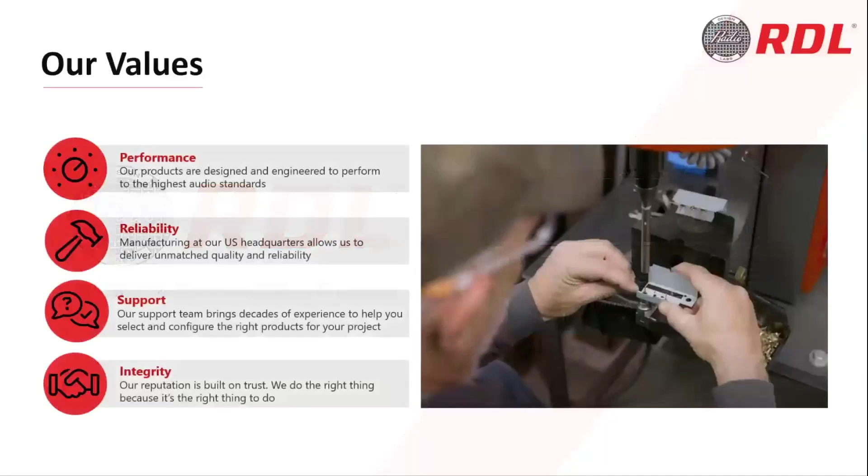Wonderful. Good morning, everybody. I also want to thank everyone for coming to learn a little bit more about our new RU-NMP44 network mixing processor. This is a great product. Before we start, I want to give you a quick background of who RDL is and our values.

If you're not aware, RDL initially started making audio solution products for the radio broadcast industry nearly 4 decades ago. The broadcast industry demands that their audio products produce studio quality audio signals, they have precise adjustments, and they are extremely reliable. RDL designed and engineered our initial products to meet those demands, and we've maintained the same production quality and high standards through today.

We build all of our products in-house at our factory here in Arizona. And this hands-on approach allows us to oversee every step of the production process and know that we're delivering products with unmatched quality and reliability. We also have a very experienced technical support team who's ready to assist you with your projects and product needs.

Since the beginning, our customers have relied on RDL to support everything from standard commercial projects to mission-critical installations around the world. RDL's reputation is built on trust. We will always do the right thing because it's the right thing to do. That is our company culture.

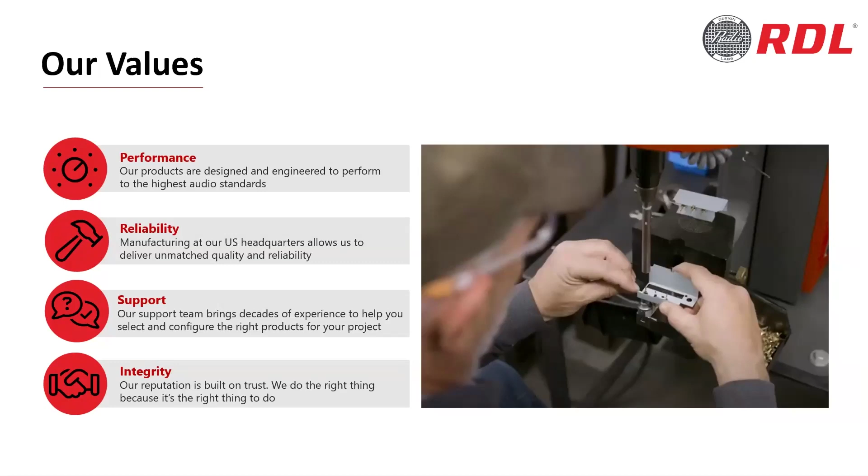This presentation will be divided into 5 parts. First, I'll play the short introductory video in case some of you haven't seen it. Second, I'll review our software configurable interfaces and our compatible remote controls. Third, I'll review several system application drawings to show you the flexibility and the versatility of the RU-NMP44 and to help you better understand how to use it.

Fourth, I'll give you a brief overview of our Console 2.0 software. And then last, I'll show you the basic programming features for the RU-NMP44. I hope by the end of this presentation, you'll have a strong grasp of where and how to use this processor and feel that it's very easy to program and configure. So with that.

Every day, there's a venue in your region looking to add multi-zone audio. It could be a brewery with different areas, a fitness center, a hotel, or so many more unique applications. What if this venue needs to route different audio signals to different zones, especially in real time? What solution should they apply? Analog? The control would be complex, it would be hard to install, and the labor costs would be high. Network digital? Better, but how can smaller venues afford a complex, expensive DSP system? Introducing the RU-NMP44 network mixing processor from RDL.

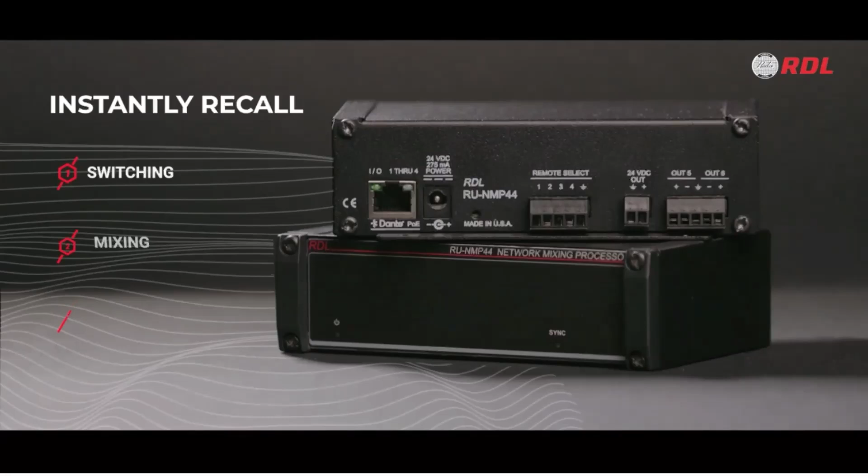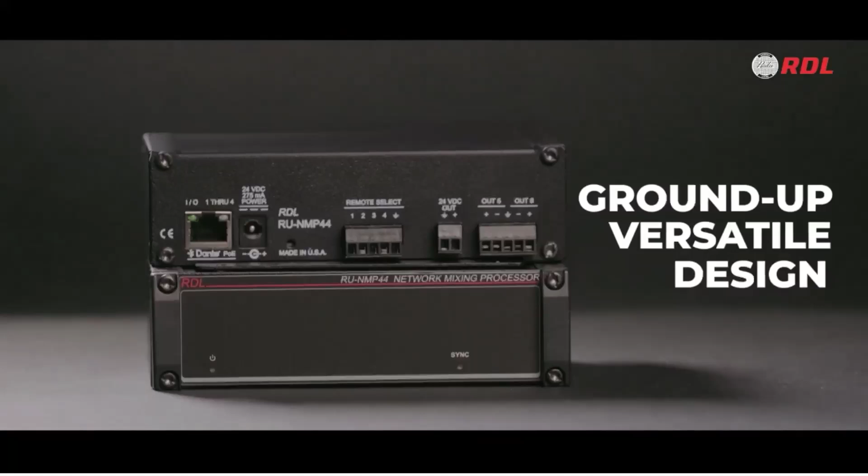The RU-NMP44 is a cost-effective network audio solution that offers network audio distribution, multiple mixers, priority ducking, multi-channel level control, and has both network and analog outputs. Custom configurations can be stored as presets for instantly recalling switching, mixing, and level changes. And with a variety of remote control options, the RU-NMP44 is the perfect mixing processor for any audio system, any size, any budget. With nearly 4 decades of innovation and industry experience, RDL is proud to bring you our latest creation. This mixing processor was designed from the ground up to be versatile, while providing all the principal features and functionalities you need to support a wide range of system designs.

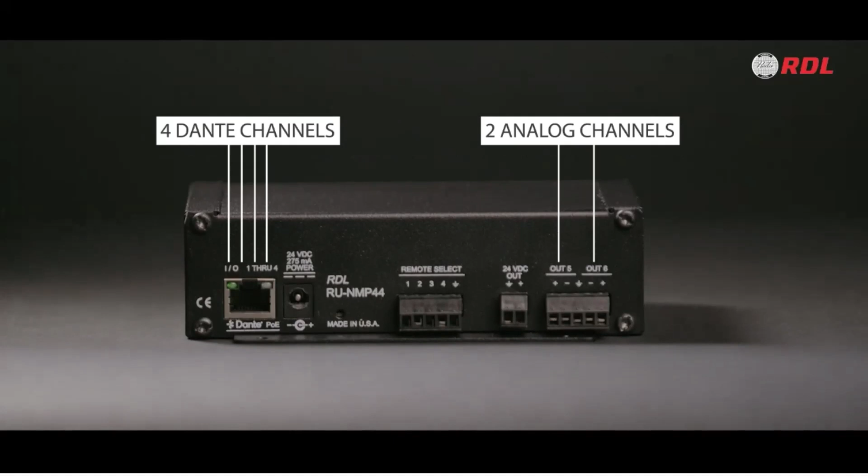It starts by sending 4 Dante network inputs to 6 4x1 mixers. 4 of them output to Dante channels, and 2 output line level. Each mixer offers automatic priority ducking with selectable high-pass filters, perfect for venues like schools and healthcare facilities, where clear announcements are vital. Audio can be distributed up to 6 zones, 4 through Dante and 2 analog. You can use single or multiple remote controls to change presets and adjust individual features for each zone. Imagine a hotel, resort, or restaurant seamlessly controlling audio levels across separate zones with ease. Lobby, reception, foyers, and beyond.

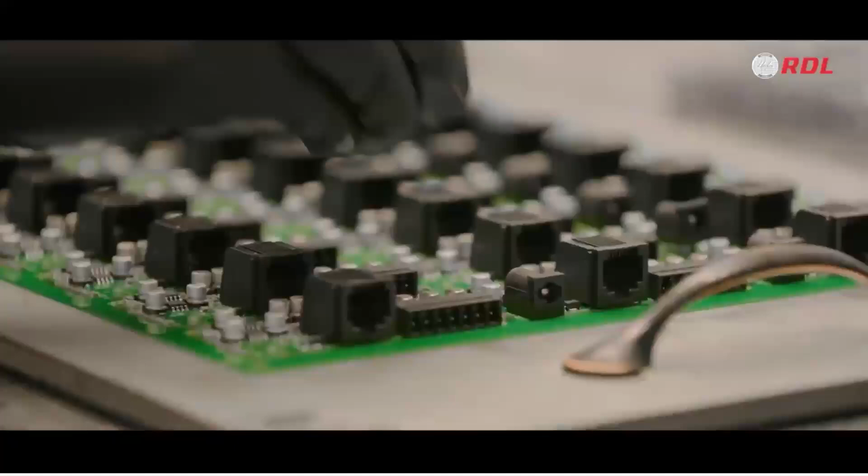Whether it's the core product in a single audio system or part of a larger design, the RU-NMP44 is ideal for adding volume control, mixing, switching, or ducking to any network system. From the beginning, RDL has earned a reputation for building high-performance audio products that are trusted in installations throughout the world. And like all our products, the RU-NMP44 is proudly made at our facility in Prescott, Arizona. Simplify your network audio system with the RU-NMP44 network mixing processor from RDL.

High-performance audio products made in America.

Great. Okay, so next I'm going to talk to you about our software controllable units and the remote controls that would typically be associated with the RU-NMP44 in a system design. First, I want to talk to you about the software that's needed to configure our audio products.

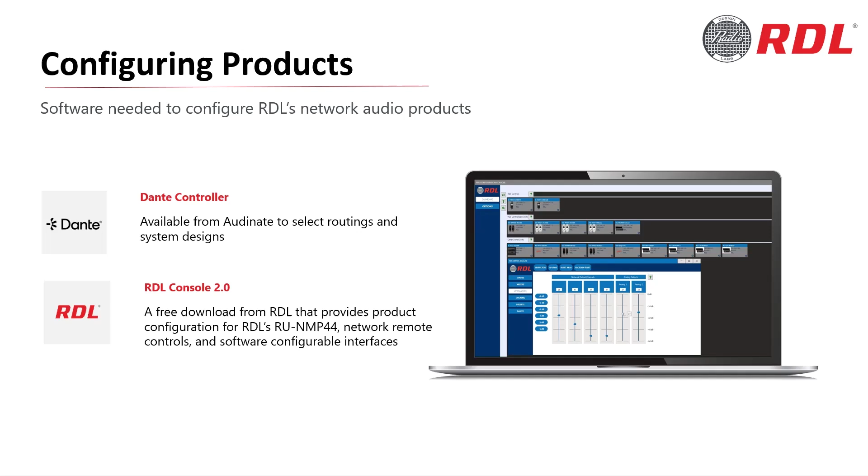Most of you are familiar with Dante Controller, which is primarily used to route the signals in a network audio system. RDL's Console 2.0 is a free downloadable software program that operates in conjunction with it by providing the product configuration features that you need for setting and adjusting RDL software controllable products. These include the RU-NMP44, our configurable endpoint interfaces, and our network remote controls.

Some of the configurable products are wall-mounted interfaces such as these, the DD-RN31, RN40, and RN42. The DD in the model number stands for dual decora. The RN stands for remote network, meaning this wall plate is software configurable.

These are all professional grade interfaces with features like studio quality mic preamplifiers, analog filtering to enhance the sound, plus they're constructed with all steel chassis and front plates. All the setup features like input gain, mic line selection, phantom power, and output levels are fully software configured and controlled.

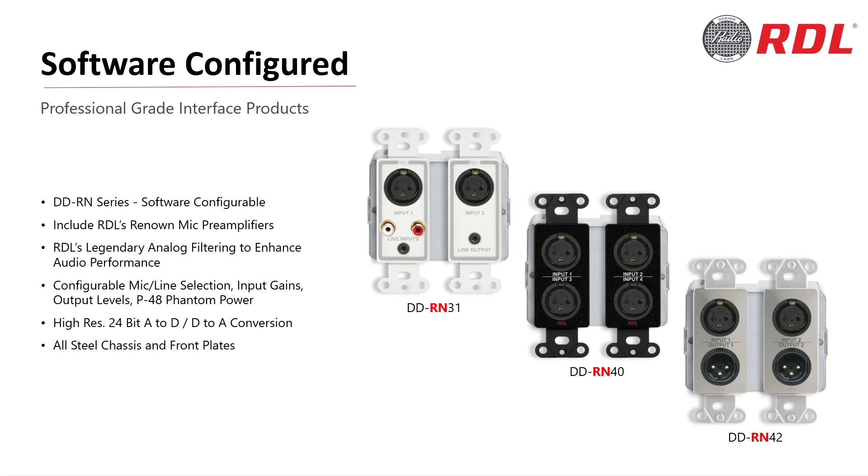These 3 remote controls are compatible with the RU-NMP44. Starting from the left, the D-NMC1 network remote control with screen is a multifunction remote control that connects directly to a network switch. It can be programmed to adjust all the inputs and outputs for all 6 virtual mixers in the RU-NMP44, as well as the priority ducking features and more.

It can make entire system adjustments by activating custom presets or provide live control over individual features. Basically, it can be programmed to control many functions or just one like volume, whatever's needed. The one in the middle is the DNLC1 network remote control with LEDs, which provides level control or volume control. The volume ramp up and ramp down speeds can individually be adjusted.

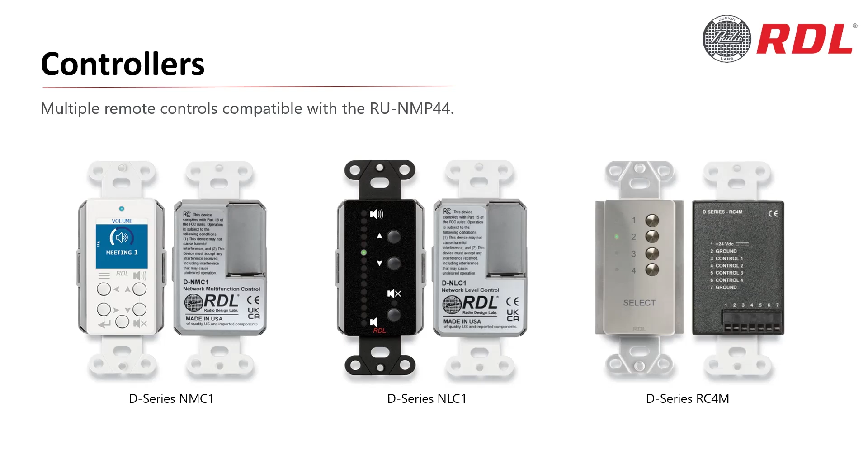Both of these network remote controls can be set as either a primary remote or a satellite control, where up to 8 remotes can work together in sync to control one system. Last, the DRC4M 4-channel remote control is an economically priced analog remote that connects directly to the RU-NMP44. This unit is used to activate the 4 system presets on the RU-NMP44, and up to 3 of these remotes can be wired together. Technically, you can use all 3 models simultaneously in a single system, which I'm going to show you in a couple of system examples.

The next system example is called 4 presets, activate system configurations, and this one's featuring the DRC4M in the bottom left corner. So with our 4-channel remote control, you can actually go into the RU-NMP44, completely design a system configuration and save that as a preset, and then have up to 4 presets total. Again, the push buttons on the front panel of the DRC4M are what actually activate those presets. So in this case, we're showing 2 zones, but it could easily be a system design with 6 zones. I think a good system example to get your arms around how this works might be a restaurant.

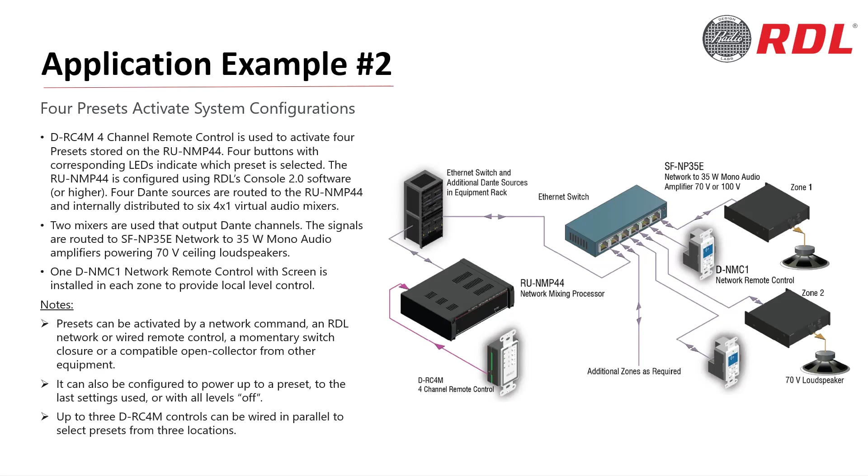The 3rd example is a single remote level control for 6 zones. I'll give you a corporate meeting room environment. I think that might be a good example of how this could be used. We want to set the levels with one of our presets for all of the 6 zones. But at some point, we've noticed that maybe in zone 2, the presenter is speaking a little soft, and we want to elevate the sound system a little bit more than what was set up on the preset.

So in the middle of the drawing, you'll see there's a DNMC1 network remote control. Now, these controls are completely individually configured. So again, my screen could actually have zone 1 through 6 listed. It could actually be the 6 independent names of the rooms themselves, whatever makes sense to the end user. And I would scroll up or down to the 2nd zone, click enter, and all of a sudden the screen would change to a volume control. Now I just simply increase or decrease the volume as needed, hit enter, and the screen is restored back to the first page. Very simple and easy to use for the end user.

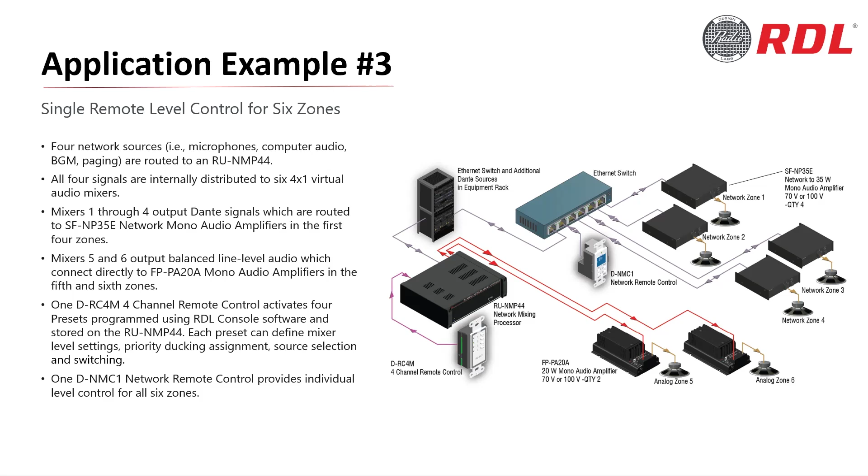I actually see this being a very key example of how the RU-NMP44 could be used in many system applications, standalone or as part of a much bigger system that has additional DSP units as well.

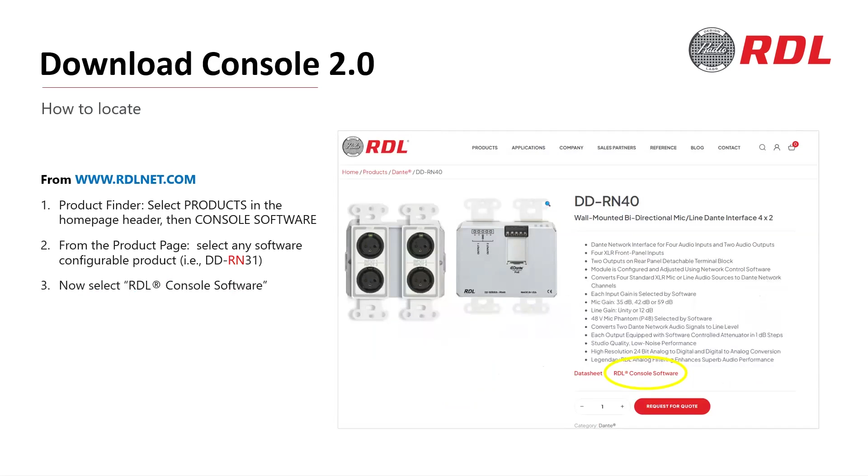There's another way to get there, and that's by clicking on the product page of any of our software configurable products like the RN series. Click on that or the RU-NMP44 page, and you'll notice that towards the bottom, there's an RDL console software link. Click on any of those and it'll take you directly to the console software page.

Now, once there, you'll notice that on the middle left, you'll see a download button. And in that button will always be the latest version. It's a great way to just check to make sure you have the latest version of this software. Again, it's free, downloadable.

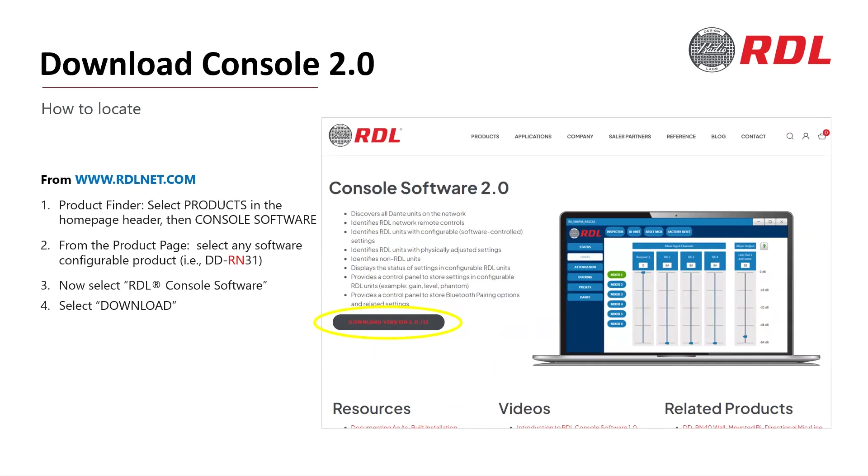Once you actually download it and activate it, the software pings the entire network to see every single Dante product, RDLs, and other manufacturers' products that are in the system. And it divides it on this page, as you see here, into 3 separate sections.

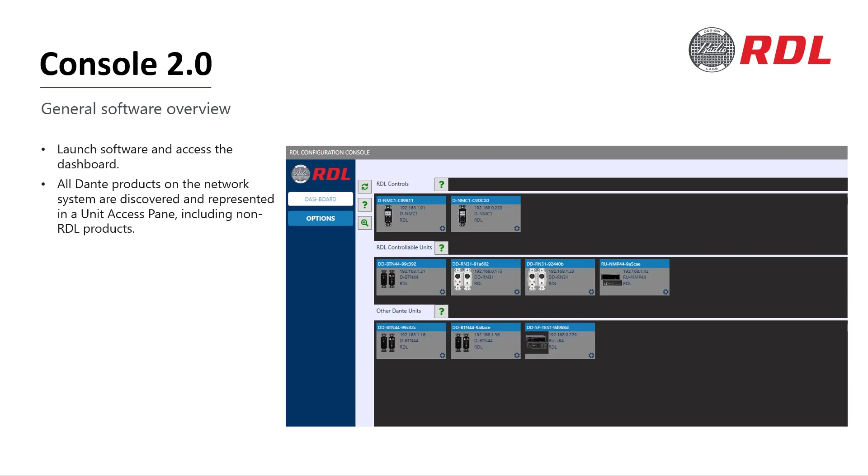The first one on the top is called RDL controls, and this means our network remote controls. The second one is controllable units. This means our software configurable devices like the RU-NMP44 itself and the wall plates I showed you a few slides back. The third section will be comprised of all of our non-software configurable products, the ones that are physically adjusted with buttons and switches, and other manufacturers' products.

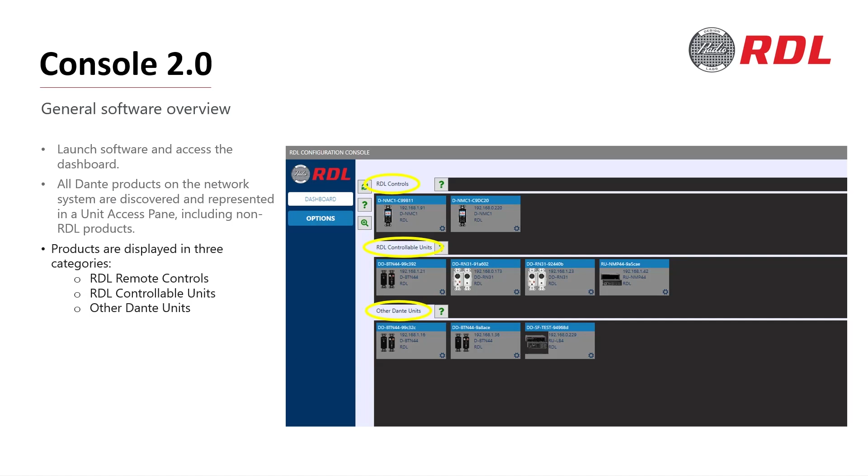Once it detects all the products in a system, if anything is disconnected, the little window pane that represents each product will turn red. Maybe you've disconnected it to configure some physical features if it's that type of product, or a network cable or a switch port has gone bad. This is a great way to identify which one is no longer connected to the system. As soon as it's restored, the background will turn gray.

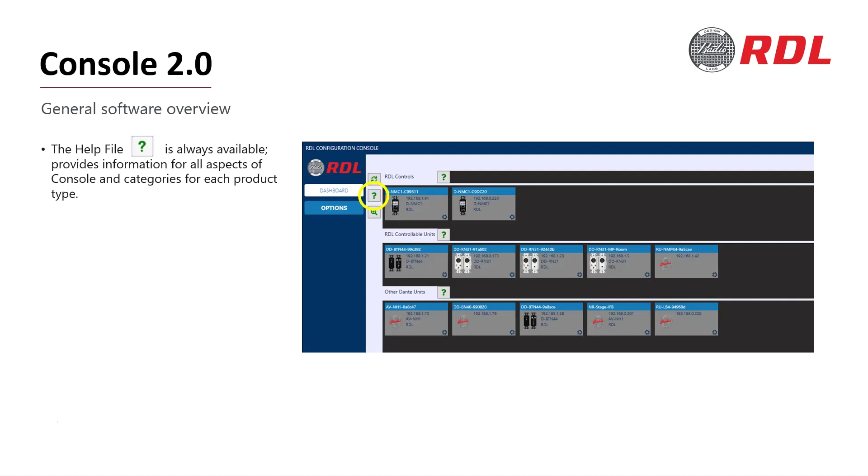Throughout this program, we have help files that can be accessed in many different ways, and it's all accessed by these green question marks you see circled here. If you click on a question mark that's more toward the left, it's going to bring up more general features. So the first thing, you're going to see a dashboard that's outfitted with multiple different options: the system options, controls, meaning network controls, controllable units, which means software configured products, other Dante units, which are the physical and other manufacturers, and so on.

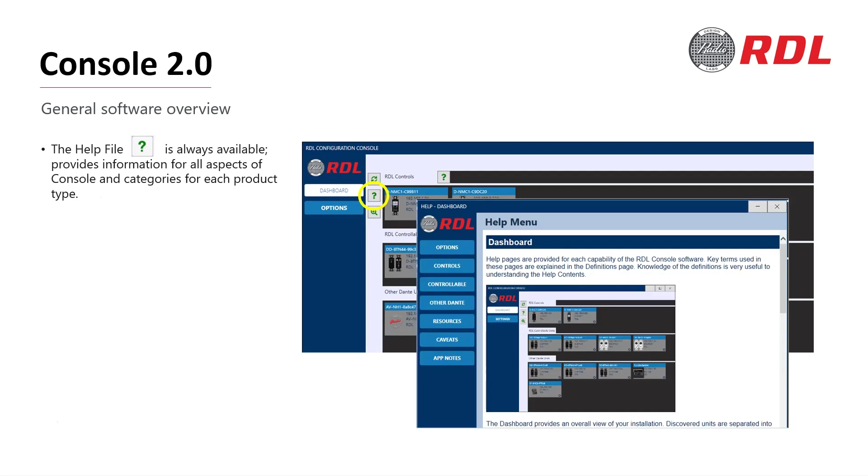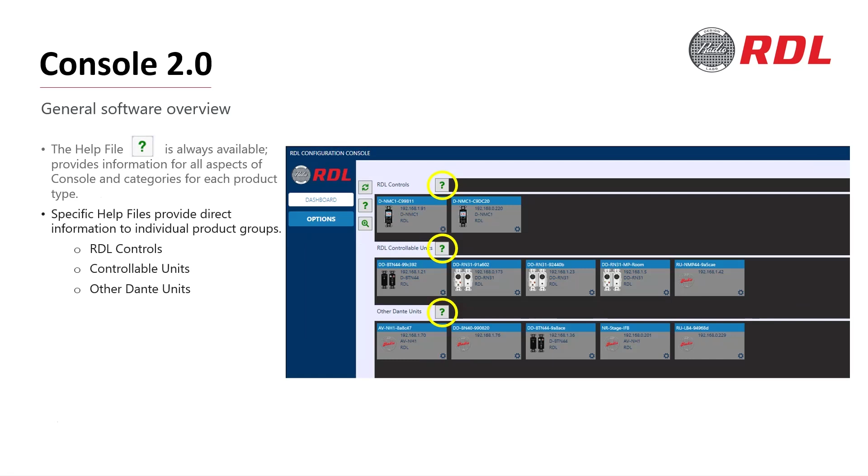If you were to click on a question mark that's a little bit further in to the right of the dashboard, this is going to be more specific, and it's going to take you to that section of the help file where it specifically deals with the product you're clicking on. So in other words, if I click on the first one for RDL controls, it brings me right to the help menu that talks directly about our network remote controls. And here's the 2 different, the DNMC one and the DNLC one to choose from.

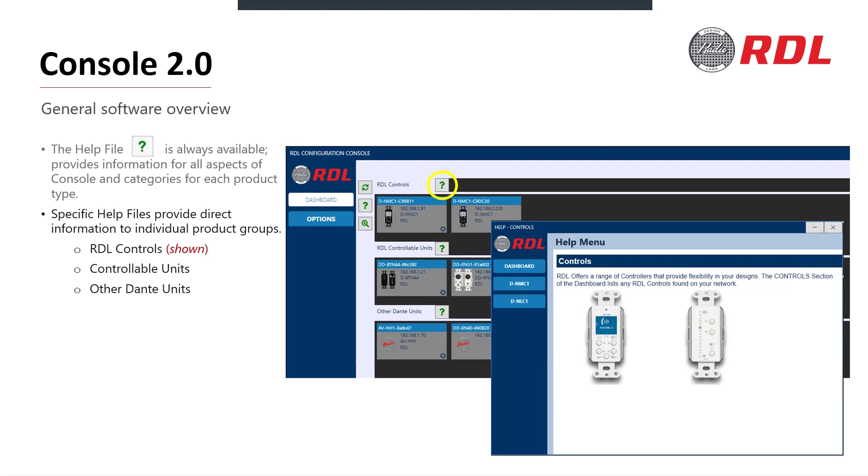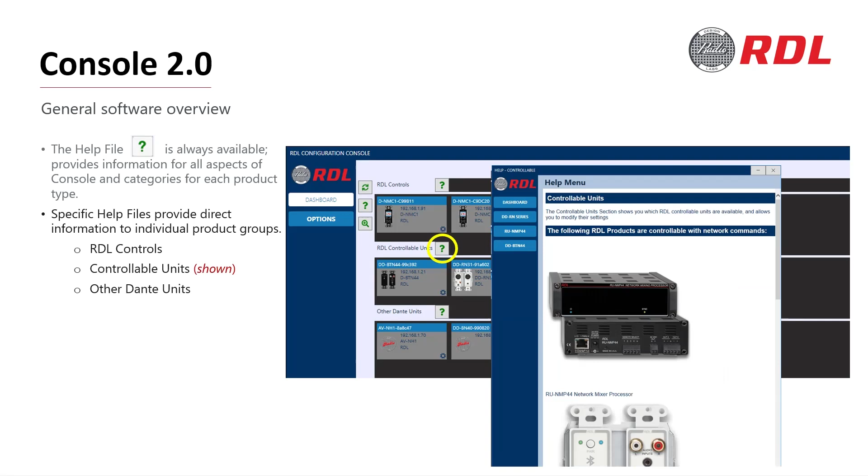If I click on the help file question mark for the controllable units, it brings up all of our software controllable products, the RU-NMP44, all the RN wall plate versions, and so forth. And then the last one is going to be for the other Dante units, which again are physically configured RDL products or other manufacturers' products.

There's 2 other buttons here. The first one with the rotating arrows, this is the refresh button. When you click on it, it queries the network for all Dante products. It'll actually discover everything out there, unless there's some products that are under Dante Domain Manager. Sometimes those products aren't detected. So the way to get around that is the bottom button, which looks like a magnifying glass with a plus in it. This is a scan feature, and it'll scan all the IP addresses on an active network. This will definitely discover all the RDL configurable products in a system.

Something else I want to point out too, this software is completely riddled with what we call tooltips. What that means is when you hover your mouse cursor over any one of these features, a small little descriptor will pop up and tell you what the button is. It's to kind of remind you what that feature is for.

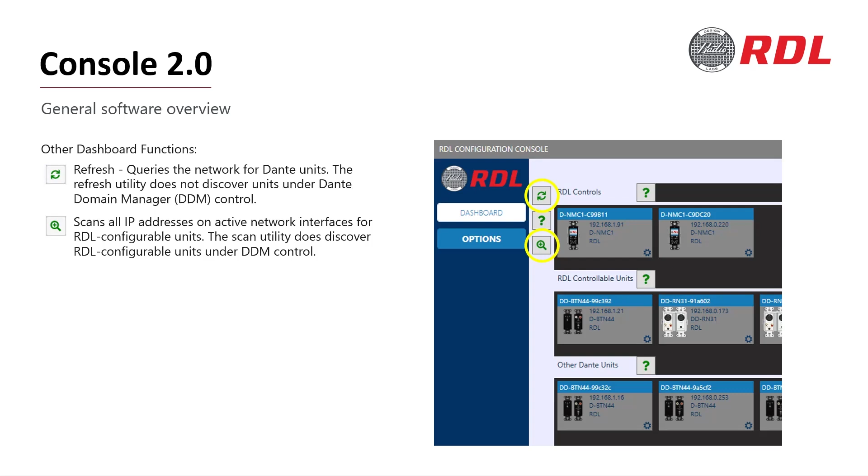Now, let's talk about the access panes. So again, there's an access pane for every single product. If you had a particular wall plate, for example, maybe you had 40 of them in a system, the DD-RN31, you would actually see 40 DD-RN31 access panes. In the pane, the first thing that you see right up front is the name and MAC address, the IP address, the model of the product, and the manufacturer.

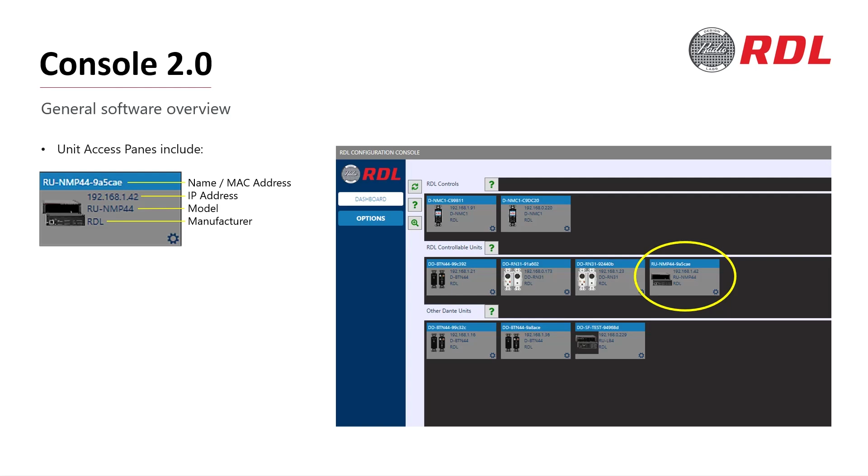If you notice in the bottom right corner, there's a little settings gear icon. Just click on this and that opens up the interface that's directly dedicated to that product. So each time you click on a different product gear setting, you're going to get a completely different graphic view. In this example, I'm clicking on the RU-NMP44, and you're going to see mixer faders and things of that nature. If it was more like a wall plate, you'd see things that allow you to adjust whether the input is mic level, line level, the different gain settings, phantom power, and so on.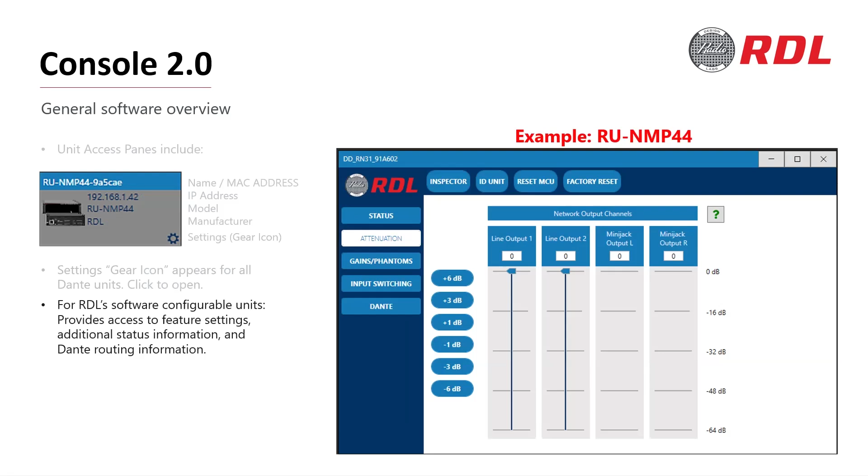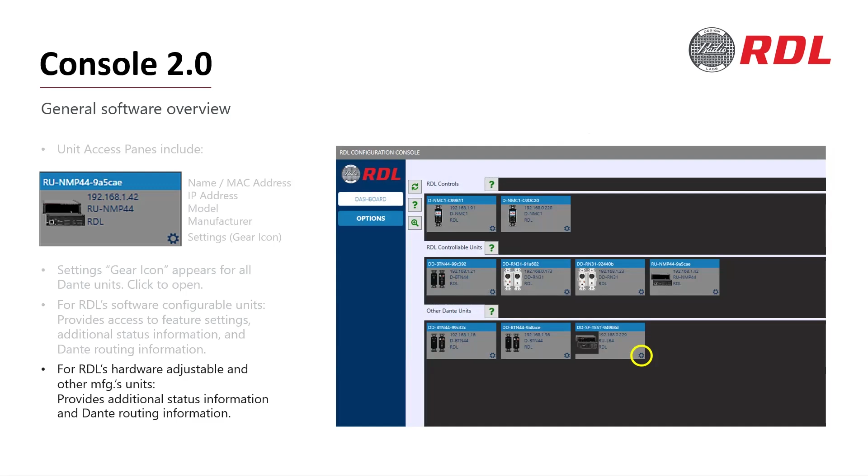Now, for the other Dante units, the hardware configured, in other words, non-software configurable products or other manufacturers' products, there's still some useful information. This includes additional status and Dante routing information, which is very helpful for the installer and the IT managers.

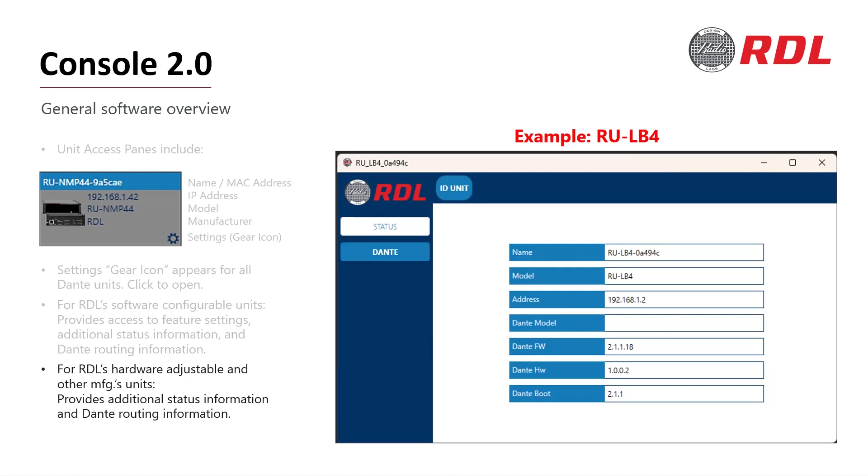Now let's talk about some basic programming. This is the last section of my presentation, and here I'm going to talk about the basic programming of the RU-NMP44, just to show you how easy it is to configure this unit.

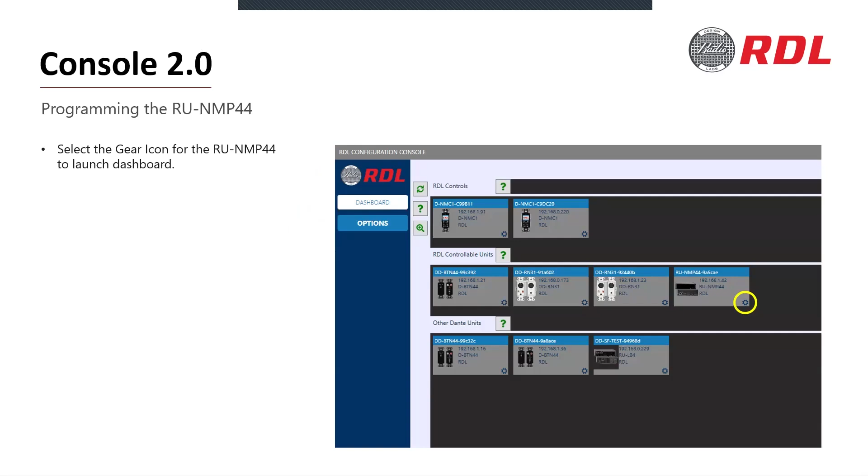As before, select the gear icon on the bottom right corner to bring up the product dashboard. The first thing it defaults to is the status page, which shows the model, address, and routing information. The next option on the left is the mixers panel. Click on that, and you'll see all 6 mixers listed on the left. Click on one, the button highlights green, and now you've got the 4 inputs and the 1 output for each of the virtual mixers.

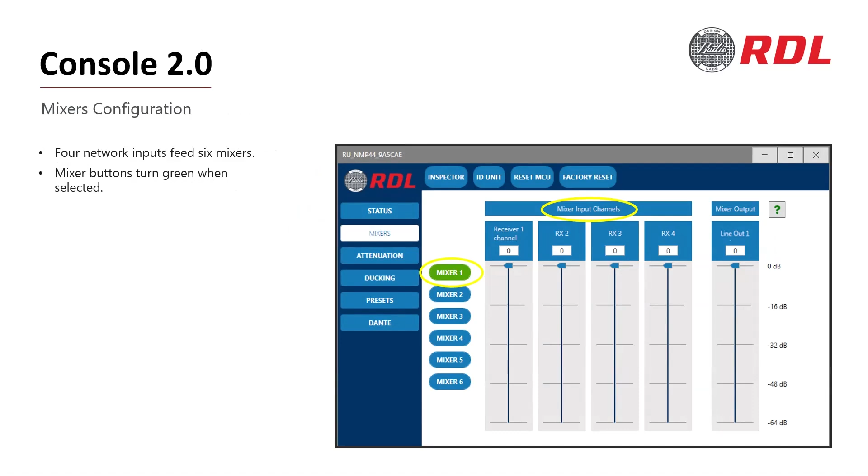The input names default to RX1 through RX4, as in receiving channels 1 through 4, and the output channel name defaults to TX1, as in transmitting channel 1. Like all Dante product signals, these names can be changed in Dante Controller, and those custom names will appear here in the mixer panel. For example, I changed the first input name to receiver 1 channel and the output to line out 1. Of course, you can name these whatever you like.

All faders provide level adjustments in 1 dB increments for precise level control. The values range from 0 dB, which is up full, to negative 64 dB, which is fully off.

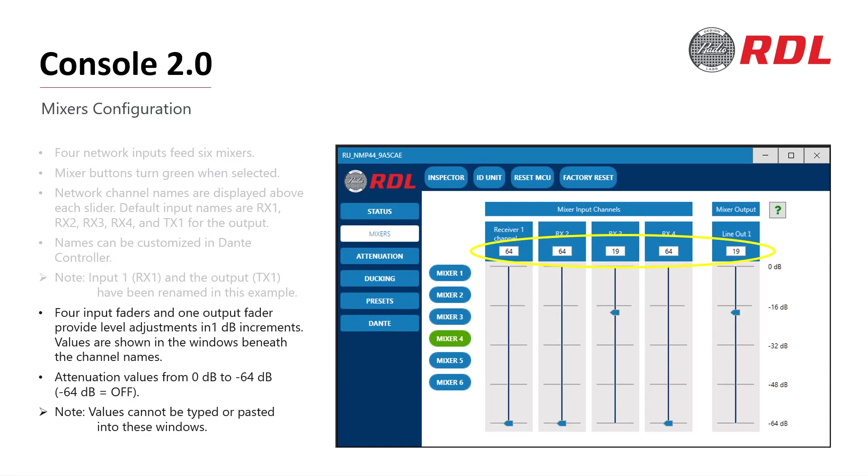The next panel section in the system is the output attenuation panel. This panel groups all the outputs from the 6 mixers in one convenient page. The first 4 faders on the left represent the mixers that output Dante network signals, and the 2 on the right represent the mixers that output analog line level signals.

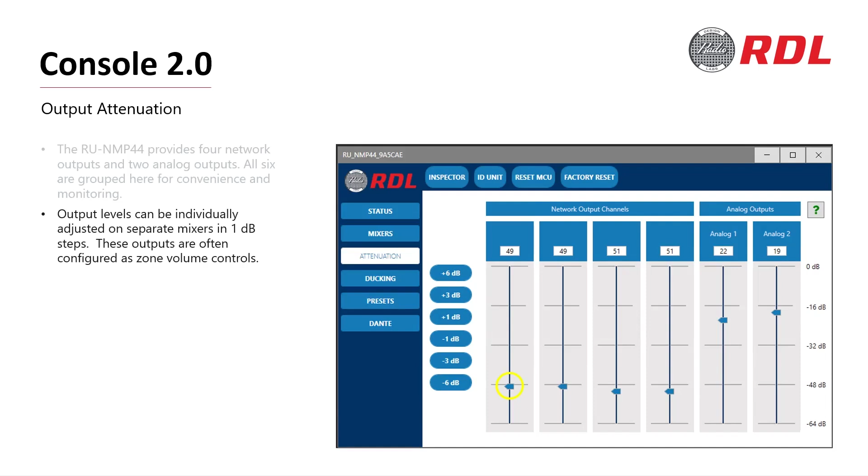Like the individual mixer panels, these 6 faders adjust the output levels in 1 dB increments for precise adjustments. For convenience, there are 6 group level adjustment buttons on the left that allow you to increase or decrease the overall system level in 1, 3, or 6 dB steps. For example, once each individual zone is adjusted to your liking, you may decide the overall system needs to be louder or softer, and these group buttons provide a great way to make that adjustment.

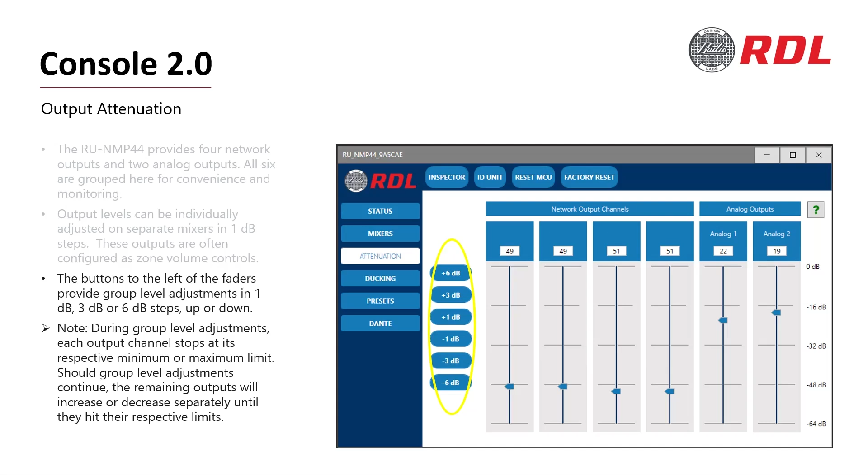The next option is the ducking configuration panel, and this is where you select one of the 4 Dante input signals to be the priority paging signal. The first field at the top shows the name and MAC address of the specific unit to be controlled, which is especially useful if there are multiple processors on one network.

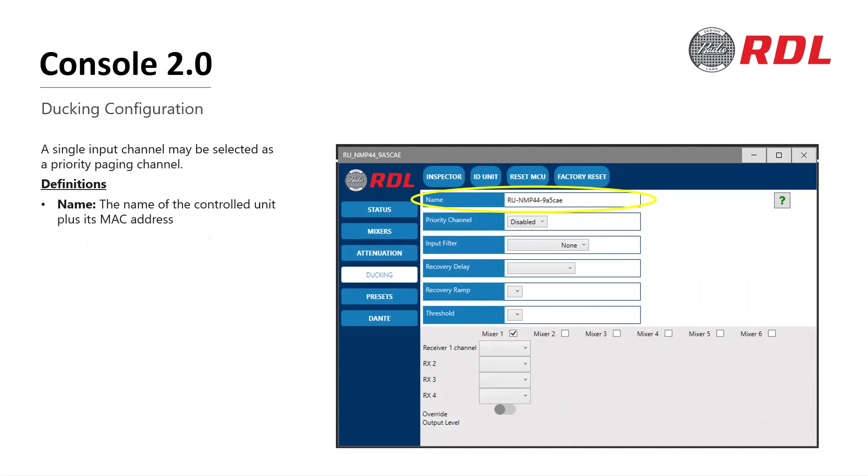Next is the priority channel selection field. Click on it to open a drop-down menu. Here you can choose one of the 4 network inputs to be the paging source. If disabled is selected, no ducking will be applied.

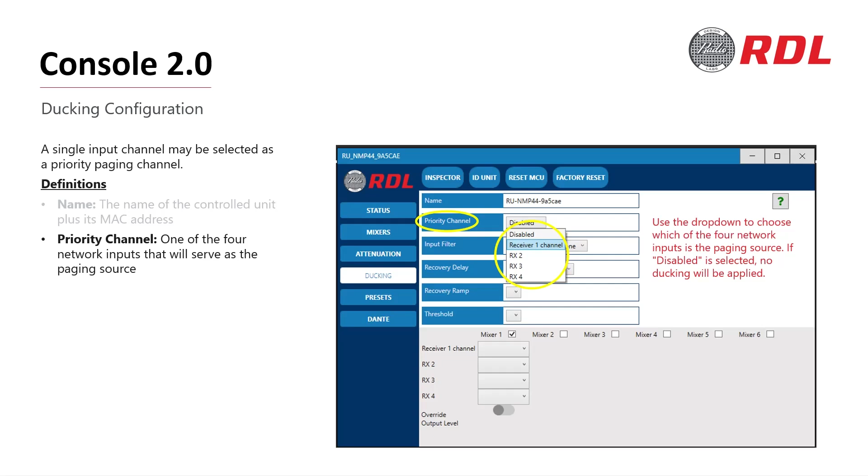The next field is the high-pass filter selector. This function rolls off low frequencies from the paging source. For example, an open microphone might be picking up the low frequencies of an HVAC or AC unit, or maybe there's hum noise in the system, and these frequencies can sometimes create a false trigger and engage the paging function when it's not wanted. Rolling off some of the low frequencies can stabilize the detection function, or you can select none if no filter is needed.

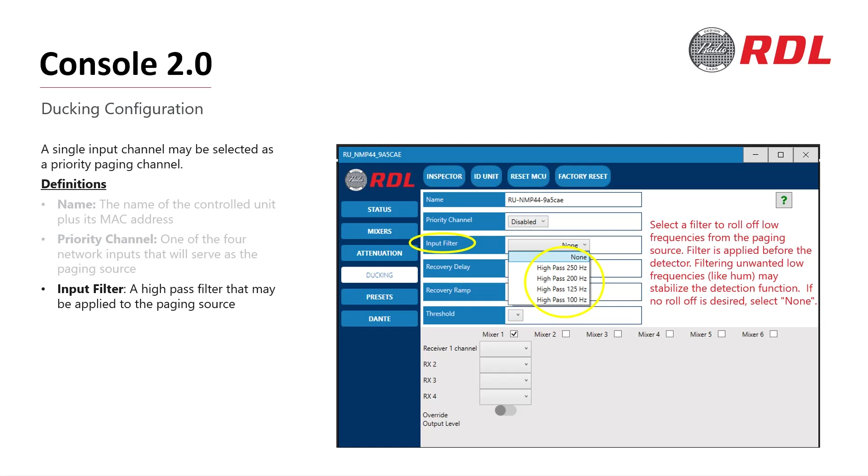Next is the recovery delay. Once the page ends, whether it's a live page from a human or a pre-recorded message, a countdown timer is engaged to restore the system levels back to normal, and this timer can be set from a half second to 10 seconds. You typically want to set the delay long enough so that it extends beyond the silent pauses between sentences or the silent period between a recorded message that might be looped several times.

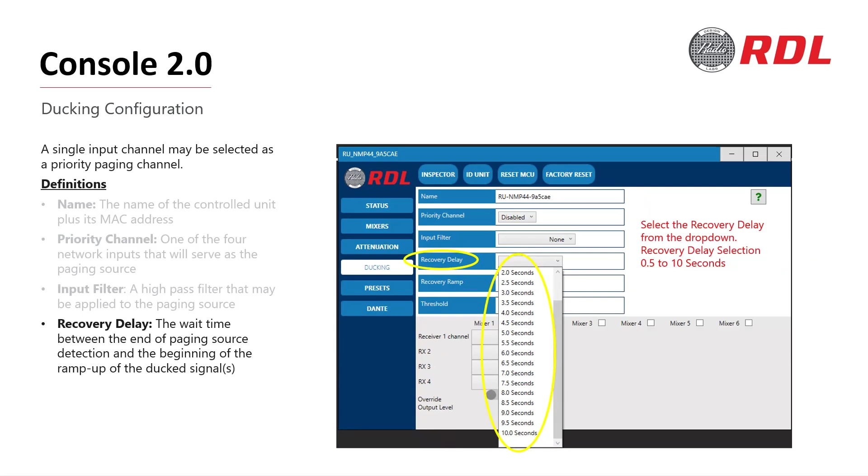Once the wait time is reached, a second process called the recovery ramp restores the system levels back to normal. The duration of this restoration period can be adjusted from 1 to 10 seconds. For example, you may want to restore a teacher's audio system in a classroom after hearing a page from the principal's office very quickly. An example of a slower ramp time could be where a diner type restaurant has an old style jukebox - after a customer's song selection ends, it may sound less abrupt if the regular background music source ramps up slowly, especially if it's in the middle of a song.

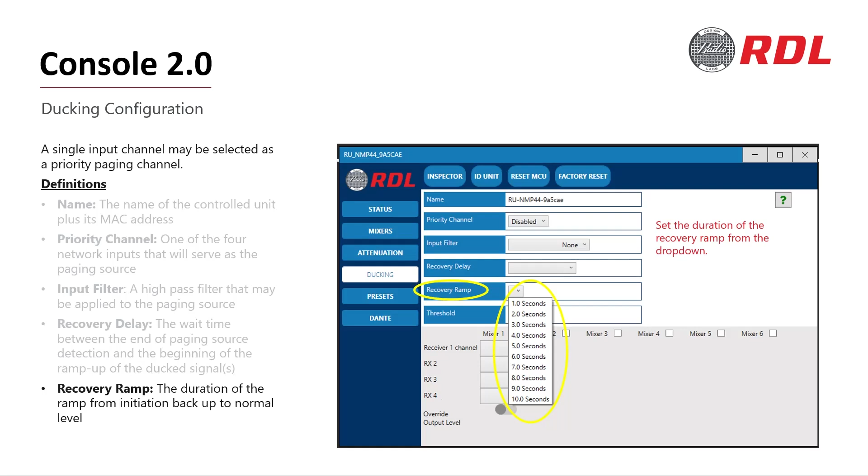Next is the threshold field. This simply means the paging source level that must be exceeded to trigger the ducking function. Any signals with levels lower than this threshold will be ignored.

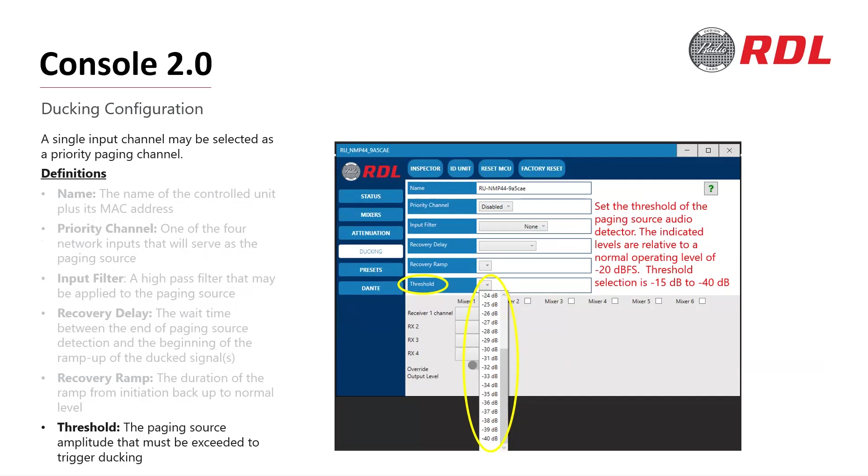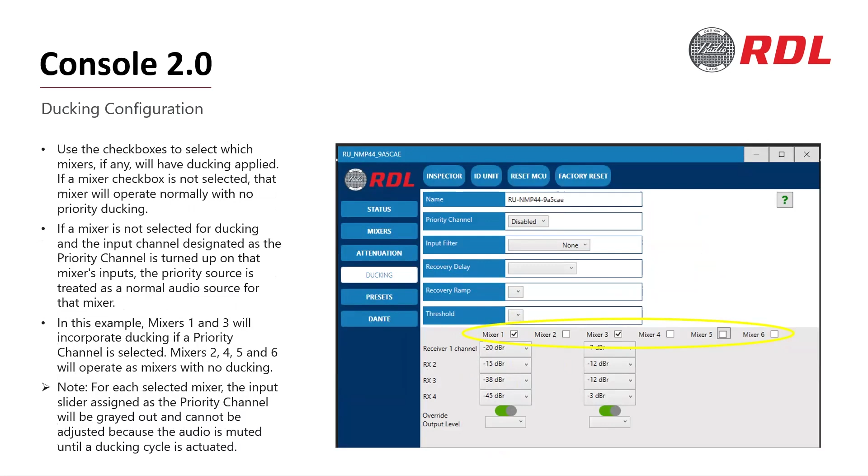Selecting a mixer opens up a drop-down menu. Let's say, for example, I selected input 3 near the top of the panel as the paging source. In the lower section, input 3 is now highlighted blue, indicating it's the page source. Inputs 1, 2, and 4 will be ducked when a signal louder than the threshold setting is detected on channel 3. The priority channel levels will turn green during the ducking cycle.

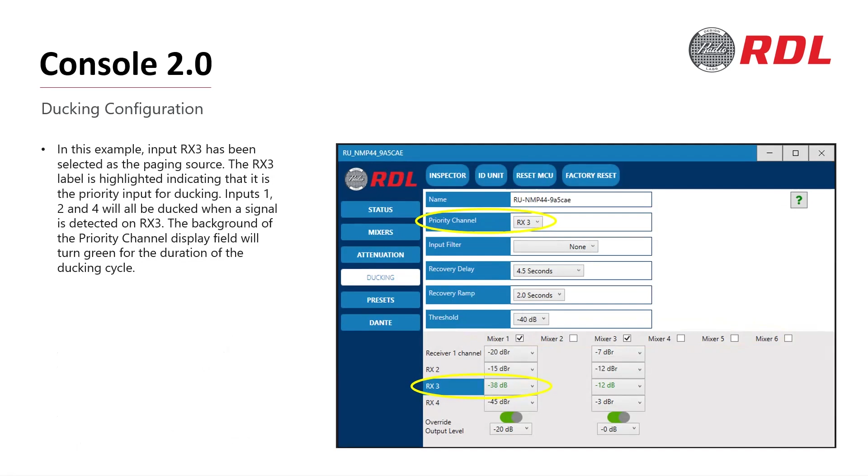The ducking levels for the other channels can be individually adjusted for each mixer. These change values are represented as dBr, which, unlike dB that represents a signal level, dBr stands for dB relative, meaning a value that changes the existing level up or down.

For example, if input channel 1 on mixer number 1 was set at -10 dB, a -20 dBr level would lower that signal level by 20 dB when the ducking cycle engages. In other words, the initial -10 dB signal level will be lowered to -30 during the page. Again, each input on each mixer can be adjusted individually.

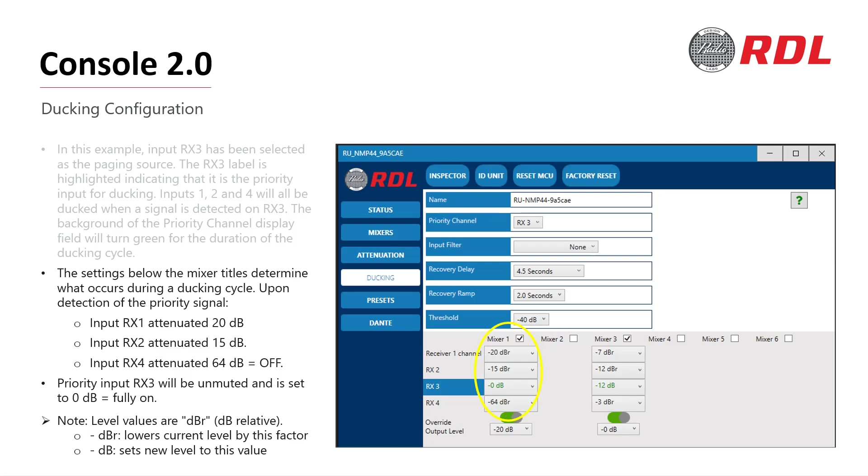Not only that, but there's an override output level feature that's available. At the bottom of this panel, you'll see an override selector button for each mixer. Select this and a drop-down menu appears, giving you the option to change the paging signal to a desired level.

Although you set an initial input level for the paging source, you may need the priority channel to be louder or softer in various zones. This operation allows that feature. So you can simply select the desired paging level for any zone.

In this example, mixer number 1 for zone 1 has the priority channel level set to -20 dB, where mixer number 3 for zone 3 has it set to 0 dB, where it needs to be much louder. The original paging level is just fine for zone number 5, so the override output feature for mixer number 5 is unselected.

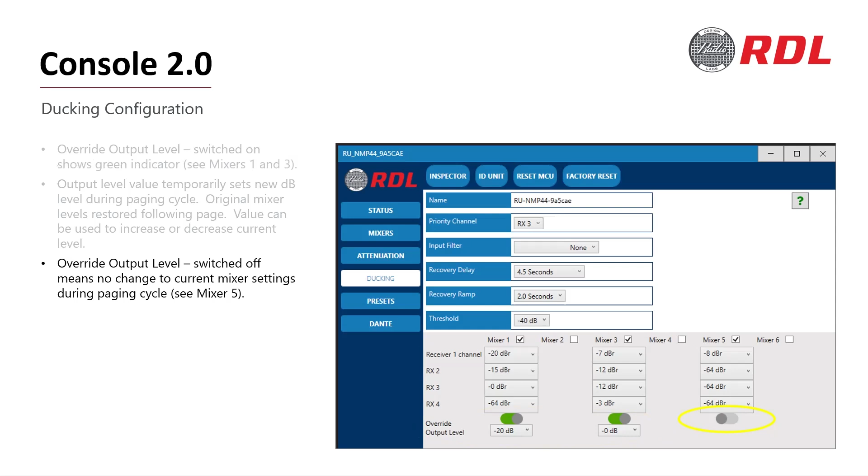Next is the preset panel, and this lets you program and store up to 4 complete system configurations for instant recall.

First, know that any of the presets you create can be selected as the power on default. Most network systems used to stay on 24/7, but now it's becoming more common to shut these systems down each night for security reasons, such as to help prevent system hacking.

The panel field at the top is where a preset option is selected, if that's how you want the system to reboot. Or you can select last state, which means it boots up to the last setting adjustments made the day before. And then a third option is you could select all off, where all input and output levels boot up to the fully off positions.

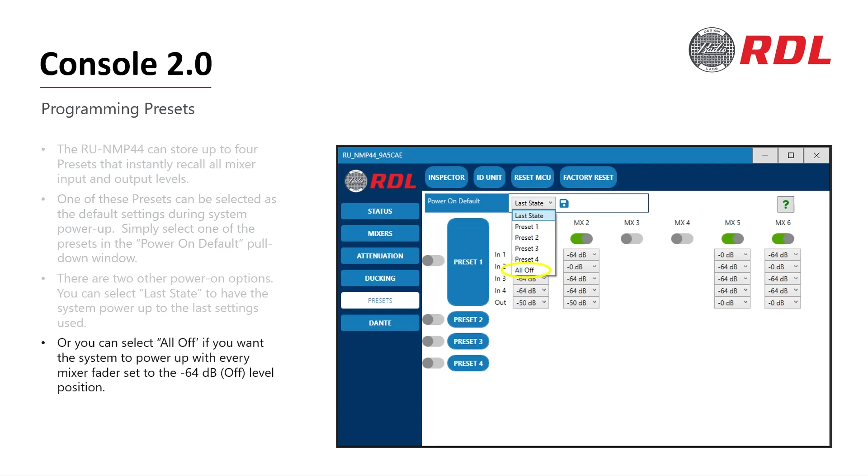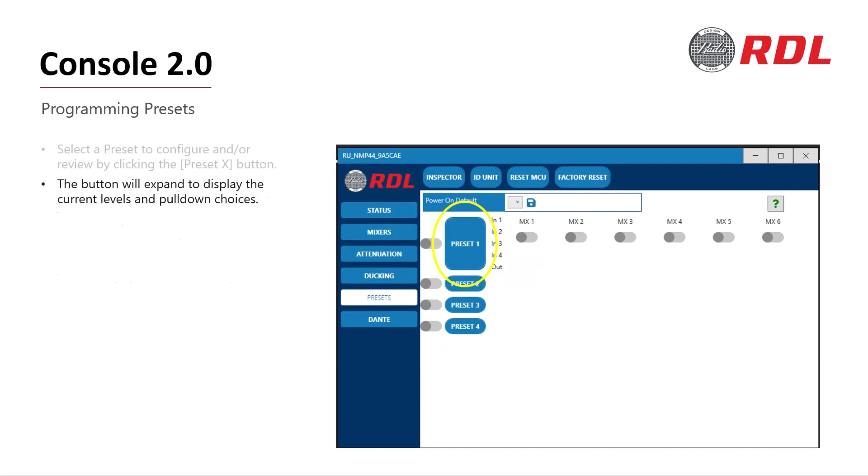Now select any preset to configure it. When you click on a button, it expands and shows the current levels and the various pull-down choices. Only the mixers you select will be affected by this preset. In this example, mixers 3 and 4 will not be affected when preset 1 is activated.

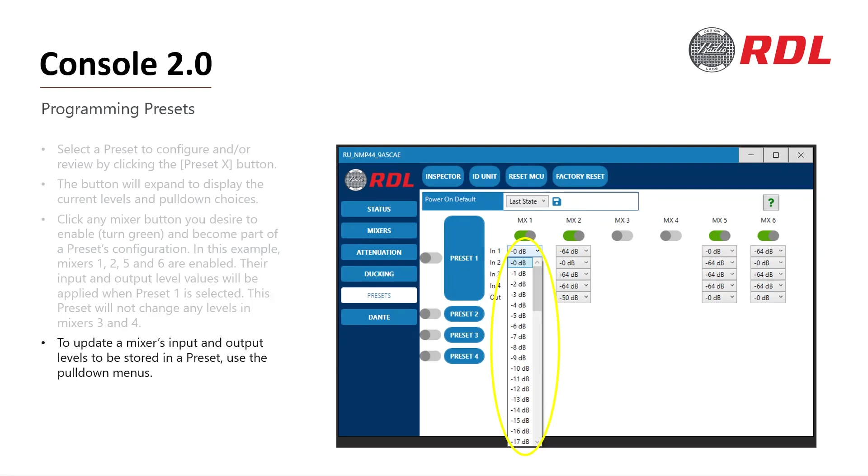Clicking on each mixer's input or output field presents a drop-down menu, and here you can set the desired input and output levels. When it's complete, click on the save icon at the top to store this configuration, then repeat the process for the remaining 3 presets.

Now you can activate a preset in several ways. One option is by clicking on the button to the left of the preset in this panel. It'll turn green, telling you that it's actually been engaged.

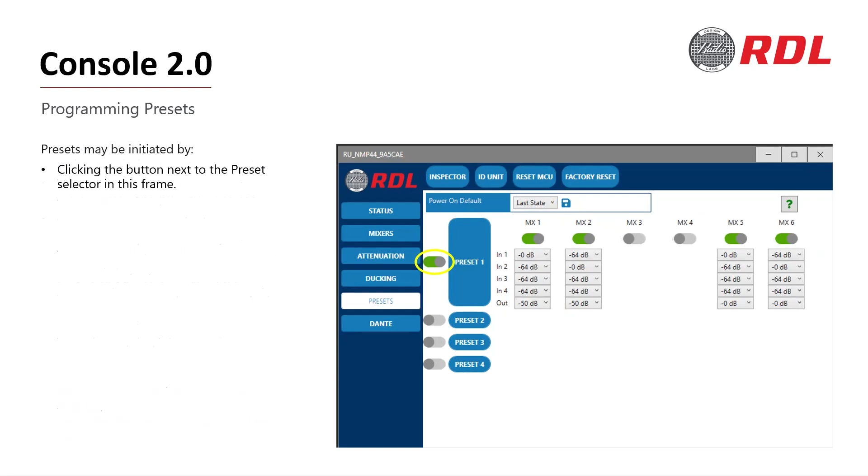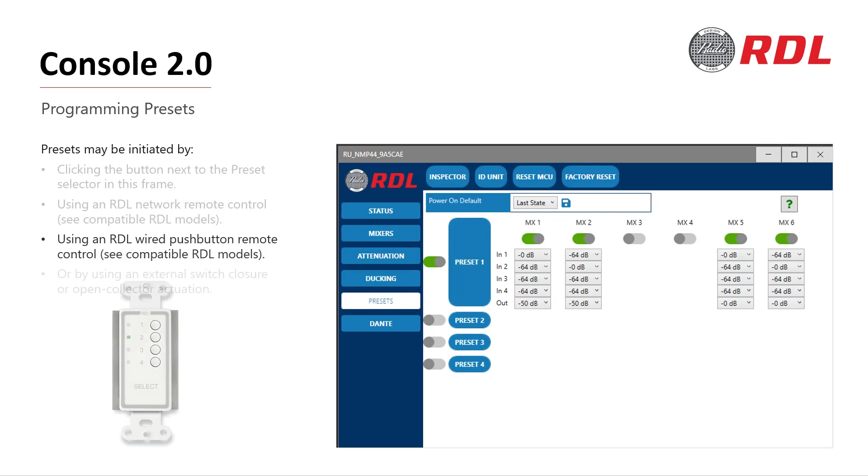Of course, you can activate them using the DNMC1 network remote control, and you can also activate it with our DRC4M analog remote control. You can also use an external switch or an open collector to activate presets by wiring them to the analog remote control terminal block connector on the back of the RU-NMP44.

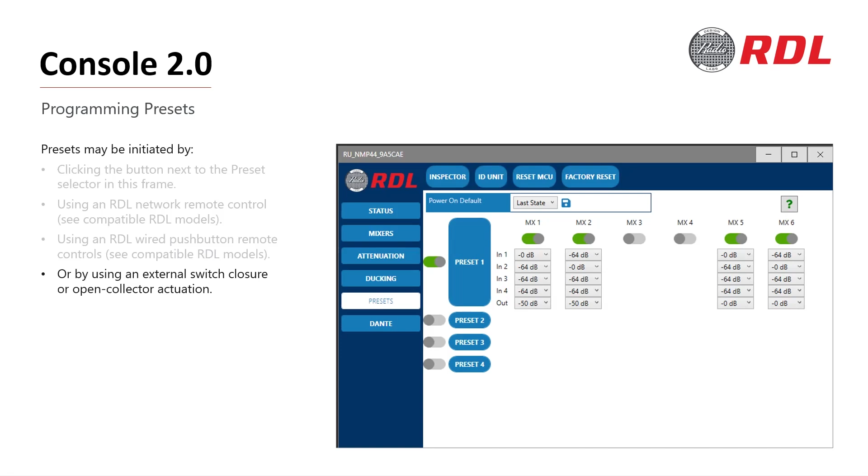So again, you can see this is a very versatile product. And last, the dashboard feature provides additional Dante information for each input.